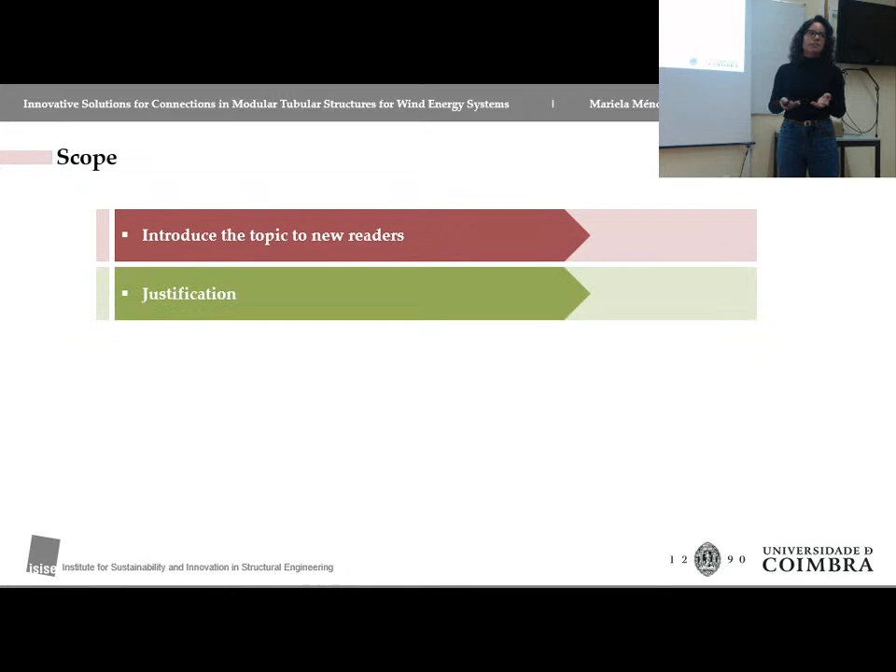I have to say that I am in the earliest stages, so you will see a lot of things of what we want to do instead of what has been done until now. And I'm carrying this research under the supervision of Professor Carlos Rebelo, Trayana Tankova, and Professor Ricardo Branco from the Department of Mechanical Engineering. So I will try to introduce the topic a little bit, where this research came from and justify the validity of it, then explain the objective that we have, the methodology we try to use, and conclude with some final remarks.

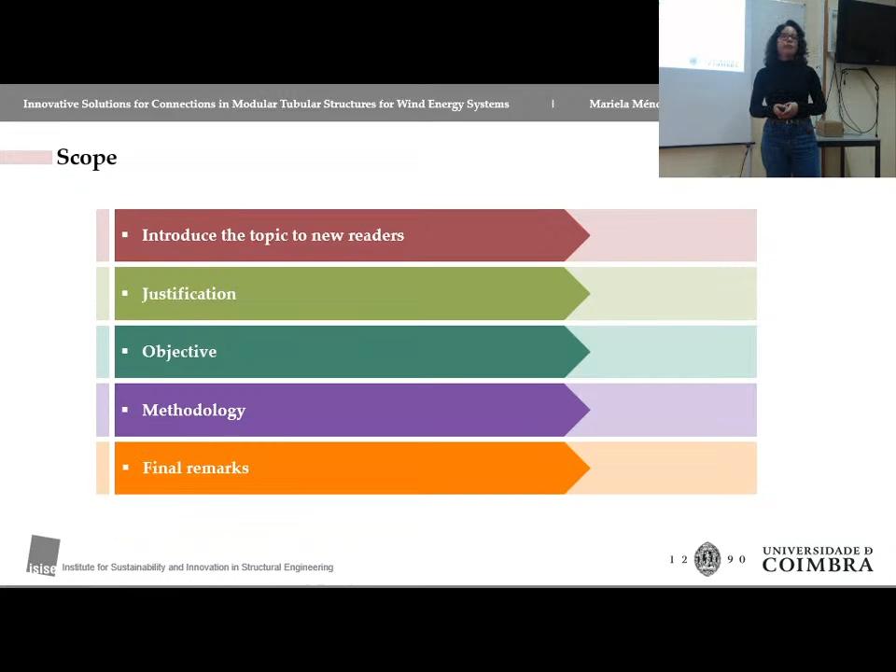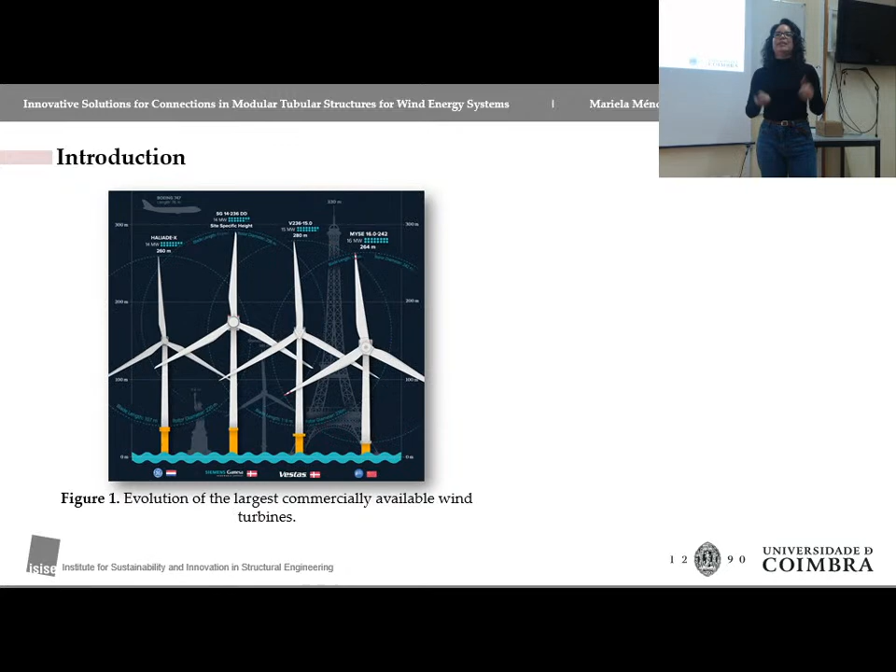But this is not only a problem of onshore wind turbines, because actually offshore we only have in the world more or less like 25-30 vessels that can transport this type of wind turbines. And yeah, I'm talking about the whole world.

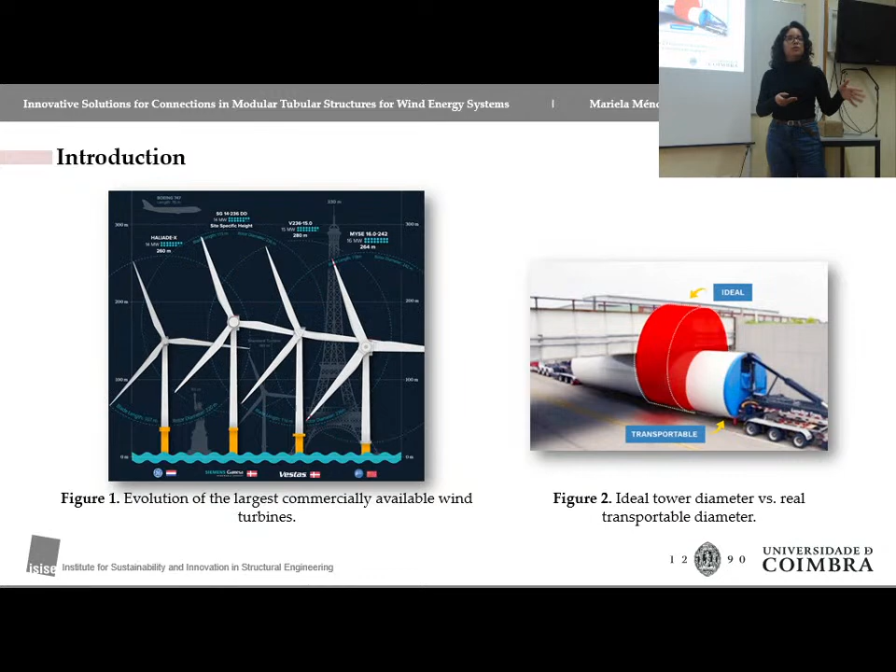So what is happening is that many countries are switching to smaller turbines again, because it's so difficult for them to find the equipment to make these installations. So in summary, we now have very big, larger turbines that require bigger and heavier supporting structures.

And this comes with two new challenges, some of them from the technical feasibility, because we now require a very high level of precision, and this has made the manufacturing costs very high as well. And some other challenges from the logistics point of view, because they are very difficult to transport, very difficult to install, and sometimes they can make potential wind sites unfeasible just because it's impossible to reach them.

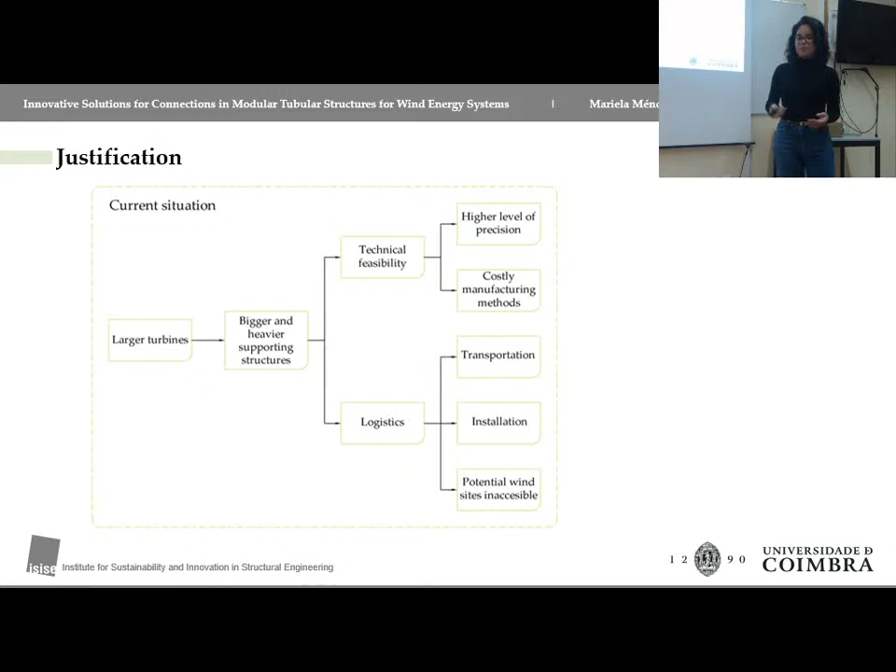So right now, the industry is trying to work on how to reduce the cost, improve the technologies that are being used, and also all of this to facilitate the installation of new wind farms.

And as I told you before, what has been happening is that we are using nowadays smaller wind turbines, or even for the big ones, there's a rise in the popularity of modular and light structures like jackets or lattice structures or things made out of panels, either concrete, steel, you name it.

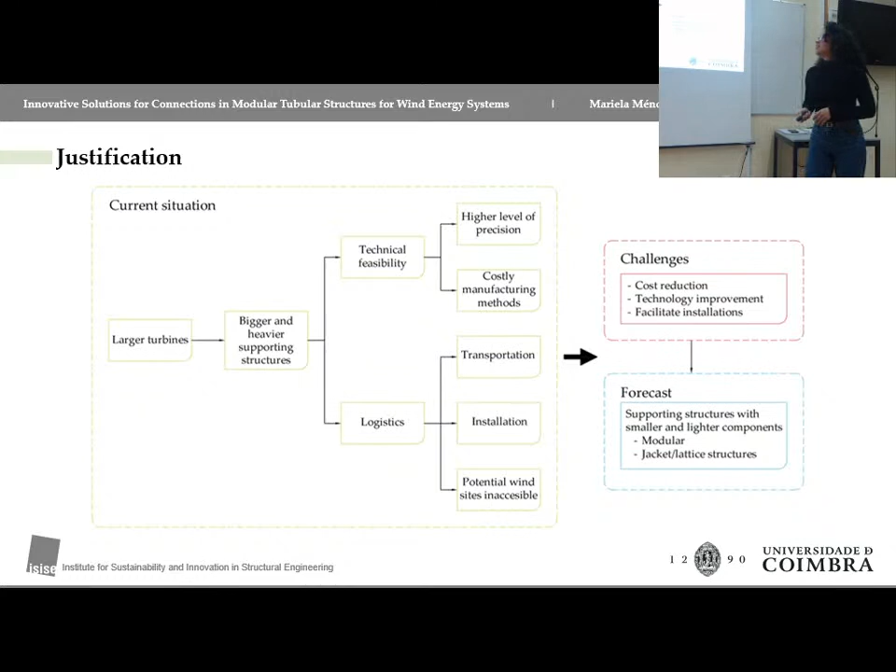So in our case, what happened was that we started working in partnership with a company called WunderOcean that has offices in Figueira da Foz, and they came up with this idea to have a modular tower that is self-assembled. So basically you have some concrete and steel panels, a steel skeleton structure, and then an outer concrete shell to protect the tower from the elements, and there's an internal rail that allows for a small crane to grow with the tower and start assembling all the pieces.

So we started developing this project, but then we came with a challenge, let's say, that we have a lot of connections.

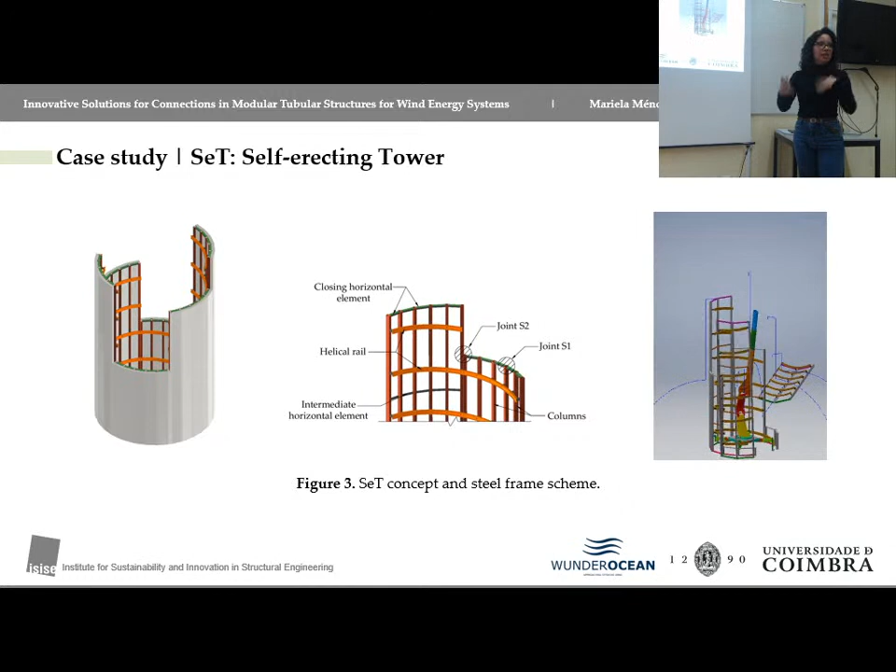Because of the modularity, because of the panels, they are easy to transport. They don't have limitations in terms of size, because now you can design them exactly to fit a lorry, let's say. But we have an enormous amount of connections. That's how everything began: how do we do this, how do we solve these connections?

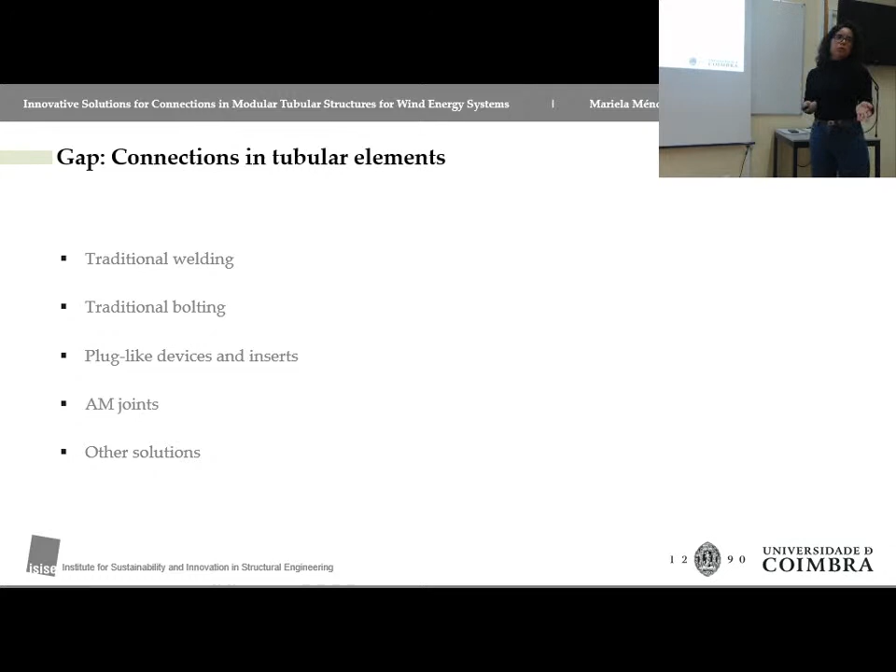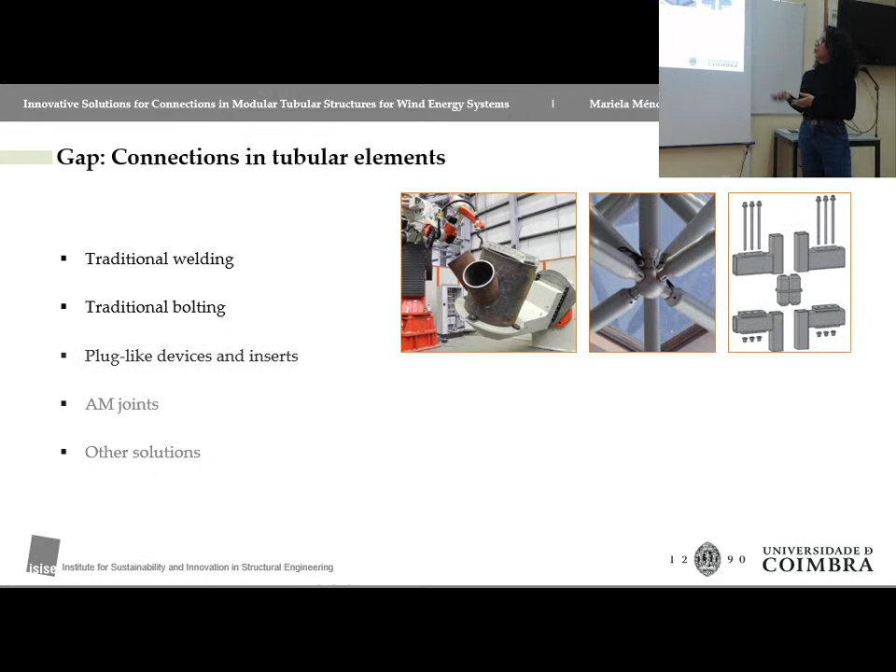We looked at what has been done recently, especially for tubular elements, because the reticular steel structure is made out of tubulars. We saw a lot of welding and bolting. Then we found, for other structures, some plug-like devices and inserts, but this has never been applied to such large structures. Then we saw the potential of additive manufactured joints, and very conveniently we now have the facilities here in our lab, along with some other solutions like cast joints or composite wraps.

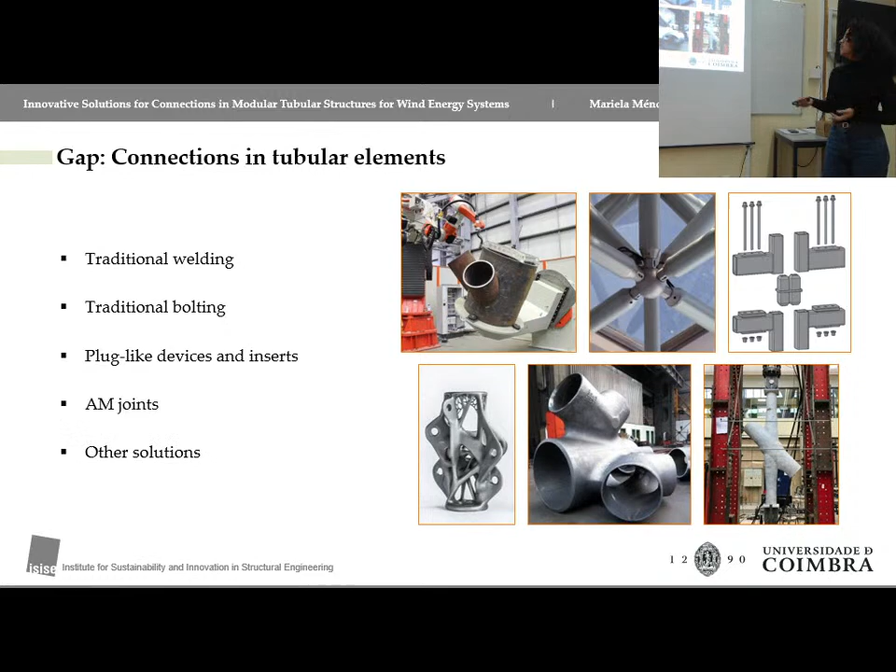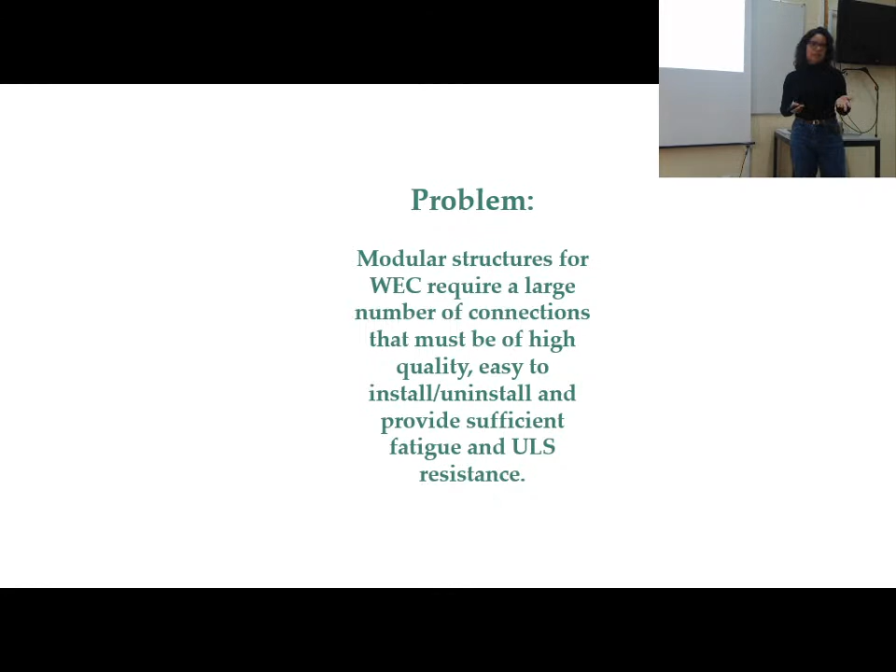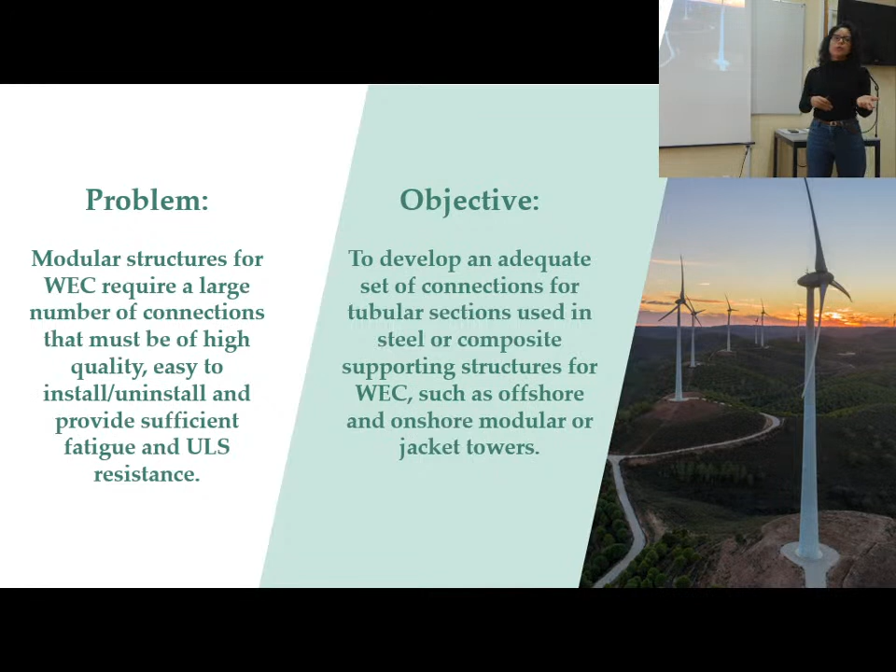So having this in mind, our problem is that we have a lot of modular structures now for wind energy converters that require a large number of connections that must be of high quality, easy to install and uninstall, and provide sufficient fatigue and ultimate limit state resistance. So we want to develop an adequate set of connections for tubular sections using steel or composite supporting structures for wind energy converters, either offshore or onshore, like modular or jacket structures.

And how do we want to do this? As I said, we looked at what has been done recently, and additive manufacturing seemed like a very feasible idea. We now have the facilities here in the lab to produce joints or pieces with additive manufacturing, and that will help us a lot with technology improvement.

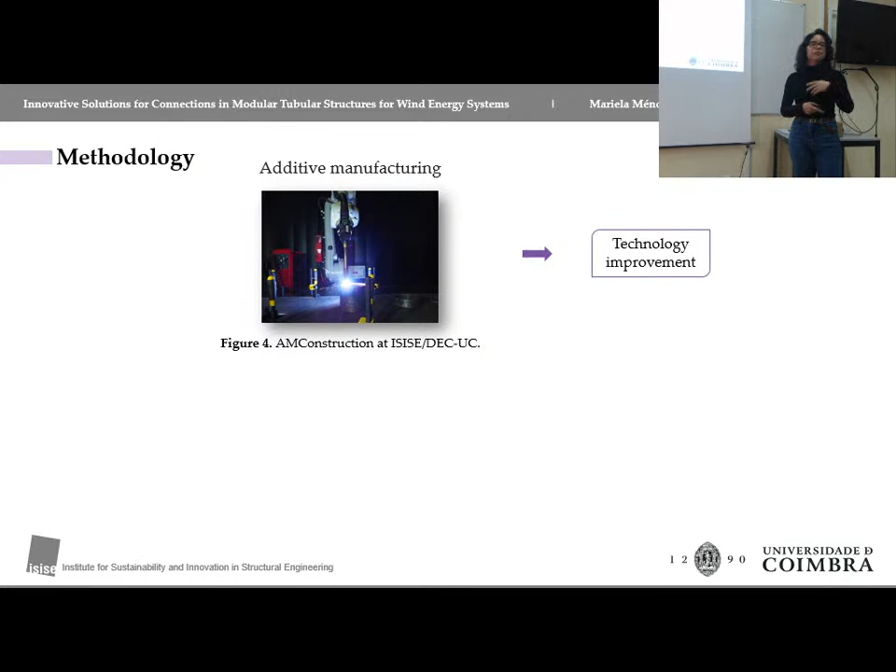I have to say that additive manufacturing is already used in the wind sector. So we got the inspiration from that—for example, you already see welding in monopiles, just internal welding for maintenance, repairs, and operation. It's also highly implemented in the production of the blades.

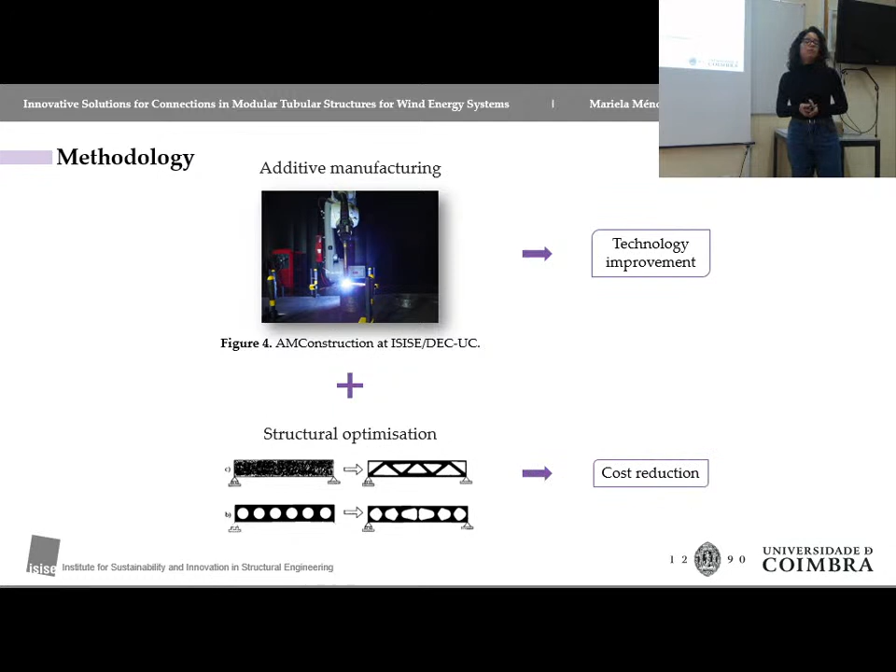But if we really want to take advantage of additive manufacturing, then we must do structural optimization that will allow us to reduce the cost, because then we know that whatever we are producing is actually going to be the most effective shape.

Then we go into lifetime estimation, durability shape, re-engineering, production, testing, and validation—but I'll go through each one. Regarding the first stage, as I told you, we develop a concept, then do a topology optimization in which we only use static loads and linear elastic material parameters. So we only input the Young's modulus, Poisson's ratio, and the density, using strain energy as the objective function and volume as the constraint.

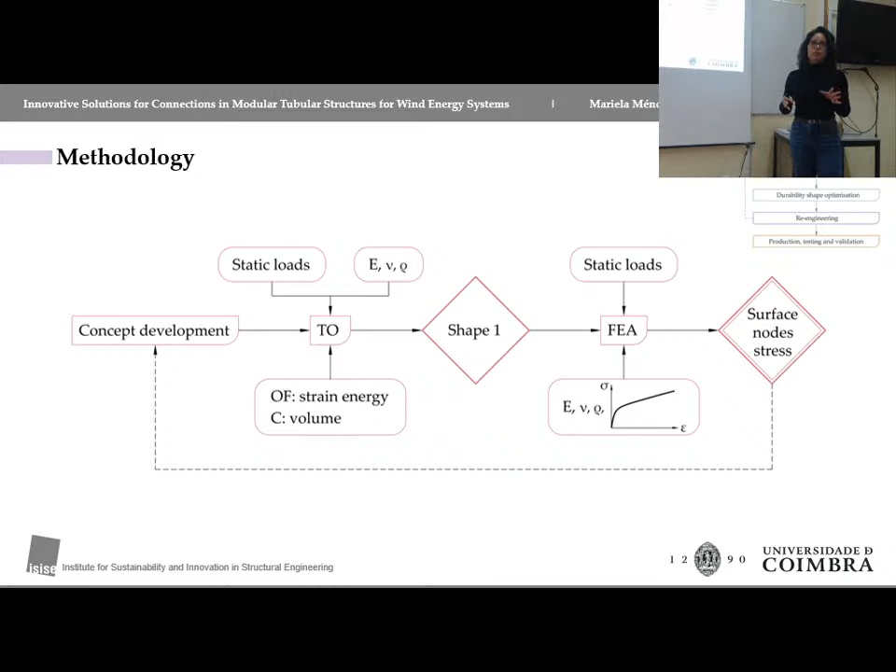So this is just a first step, just to have an idea. From that, we get a first shape. But because we are only introducing the Young's modulus—if you look at the algorithm of the shape optimization, it only focuses on the Young's modulus—we know we have a very stiff shape, but we don't know its actual resistance.

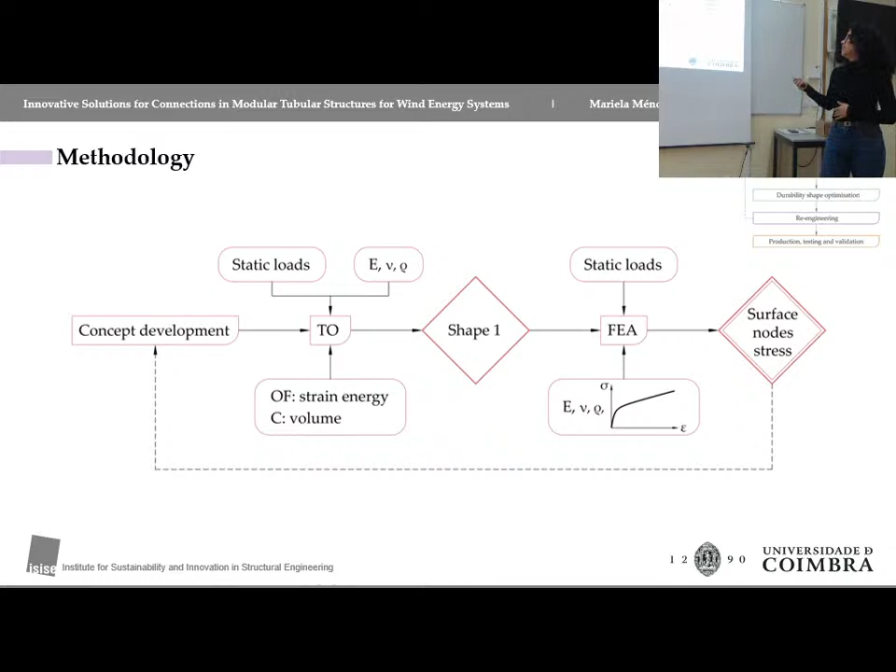So after that, we go to the finite element analysis, in which we include the plastic material properties. We can do this as many times as we want—you can change the number of bolts, the diameter, the outer tubular, any of the optimization parameters. At the end, when we are satisfied, what we want is the surface node stresses to go to the next step.

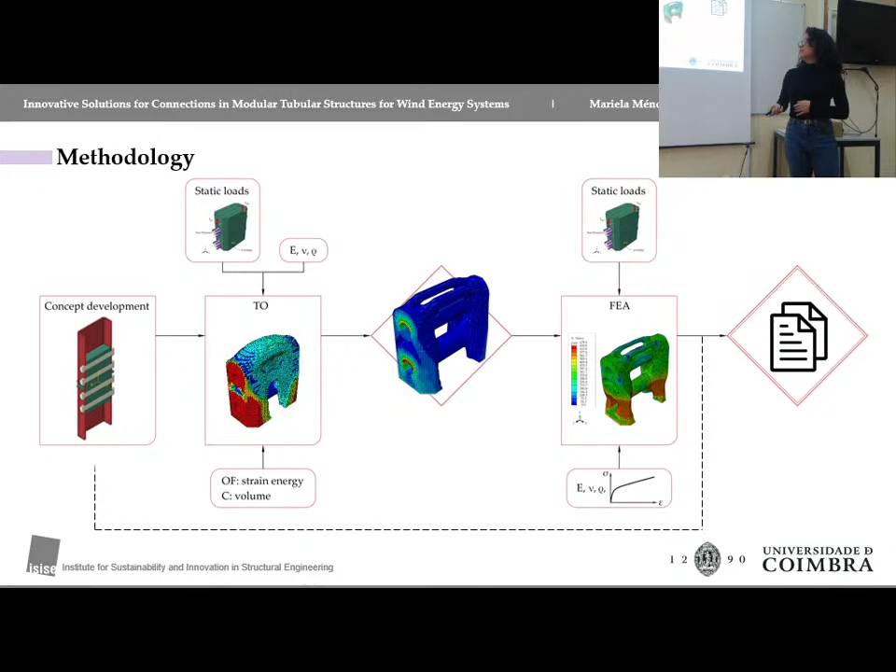So this is what I have been focusing on lately. We develop a concept that's just putting an insert inside two tubulars and putting everything together with bolts. Then we go to the topology optimization and get a first shape that we know is very stiff, but we don't know its resistance. So then we go to the finite element analysis, and we get a lot of data for the surface nodes—and this can go as many times as you want.

We also need the fatigue parameters to do this modeling. After that, we get the surface nodes life prediction, and we can do a durability shape optimization based on this life prediction. The objective function is to minimize the maximum damage and control the volume. But again, we use the static loads here, and then we get a second optimized shape.

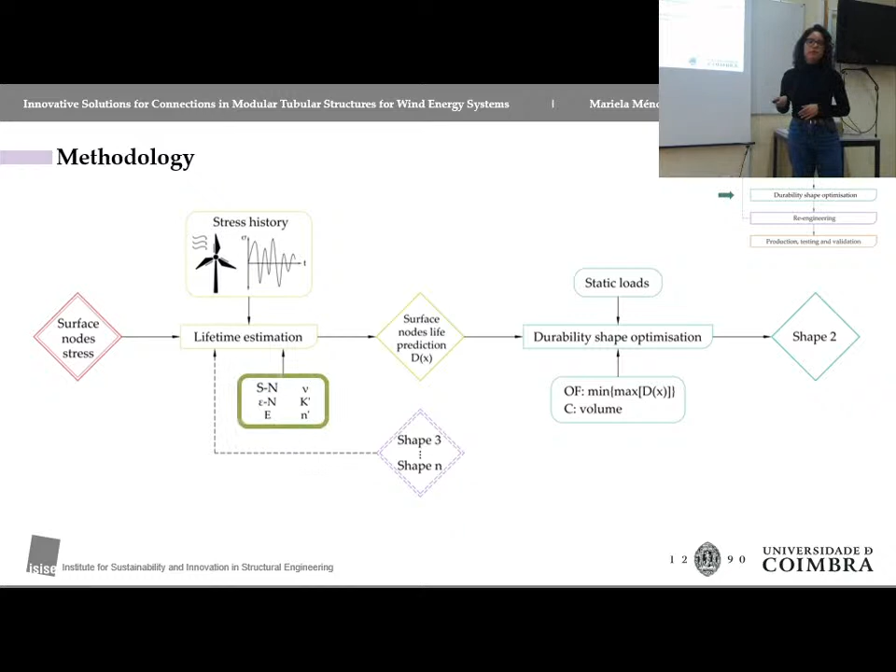Right now, what we are doing is trying to find this out. So we are focused on finding the cyclic properties of the material. How are we going to do that? Through an experimental campaign. We have divided the experimental campaign into two parts: the first focused on low cycle fatigue and fatigue crack growth, and the second on high cycle fatigue and fatigue crack initiation.

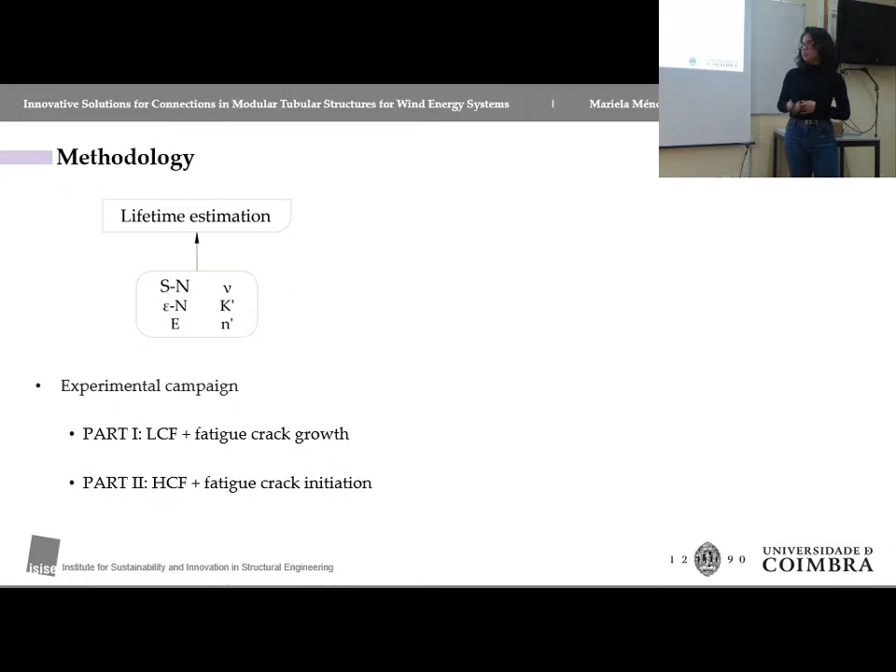In the first part, we already started, so we have the shape of the coupons we want to test, the program has been detailed, and we made the first test in the lab to see how we can print this wall, basically a big plate. We are going to get 3 fatigue specimens through the thickness of that plate to also evaluate if there is variation of material properties along the thickness of the printed material.

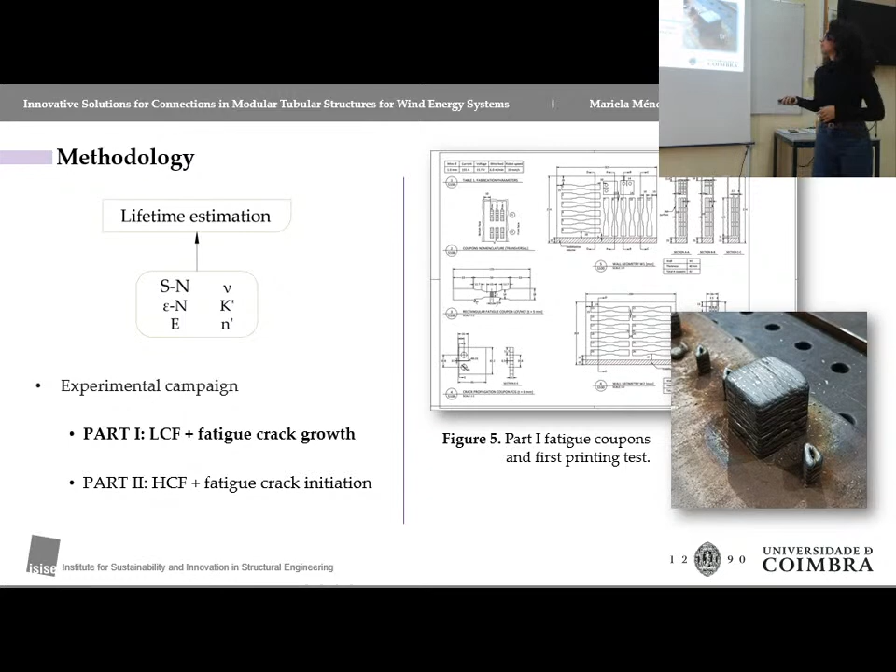After we do that, we go to re-engineering and production, testing and validation. So we get our final shape that we now know makes sense, has sufficient strength, and has the desired lifetime. That comes from a process of iterations, but let's say that's our ideal shape.

Then we have to do the re-engineering, which is very important, because not everything we do in a computer can actually be produced by the capabilities of the machines we have in the lab. So even with the most perfect ideal shape, you still have to compare that to what you can do in the lab—maybe there's something too thin, or an angle that's too close. All of those things have to come into consideration.

In this part, I want to highlight the work of our two colleagues, Carlos Hu and Kaique Monteiro, because they are working very hard to find out what we can print, what the capabilities of the robot are, and trying to build a kind of database so we don't have to go through a calibration process every time we want to print something.

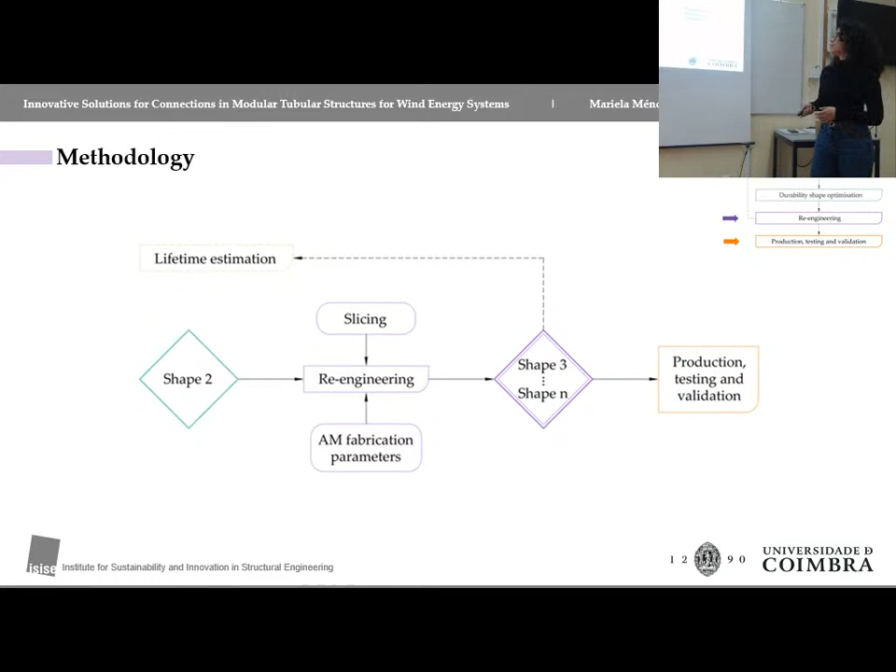After that, we get our last and final shape, which we have to check again for life estimation, because maybe we altered some details that were important for fatigue. And then on to production, testing, and validation. In theory, that's done.

But to conclude, I think it's very important to highlight the importance of modularization and simplification in the wind industry. As we saw, it's quite important to make this kind of new emerging renewable energy technology available for everyone.

Also, I think it's important to highlight the importance of using new technologies like optimization and additive manufacturing jointly. This type of optimization process can be found in some literature, in different ways, similar, but it has always been applied to mechanical parts. We got some information from what they do for pieces of engines, mainly engines, but it has never been applied as such to a structure.

To know if the shapes we come up with make sense, we are also comparing with traditional types of joints, maybe using only bolts, or plates and shear, or other devices available in the market. We found that our shapes are usually more efficient, in terms of strength and volume, in over 60% of the compared cases.

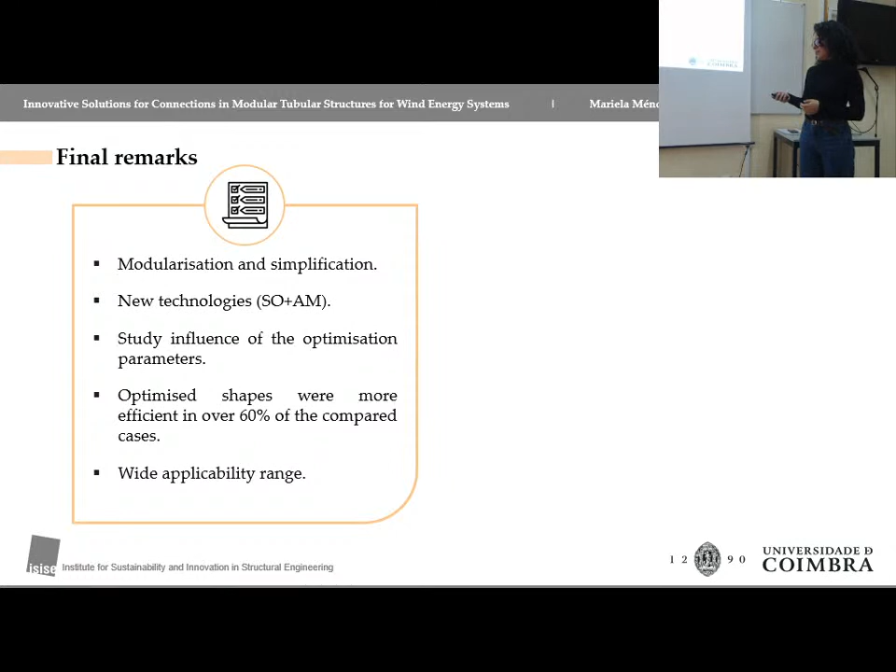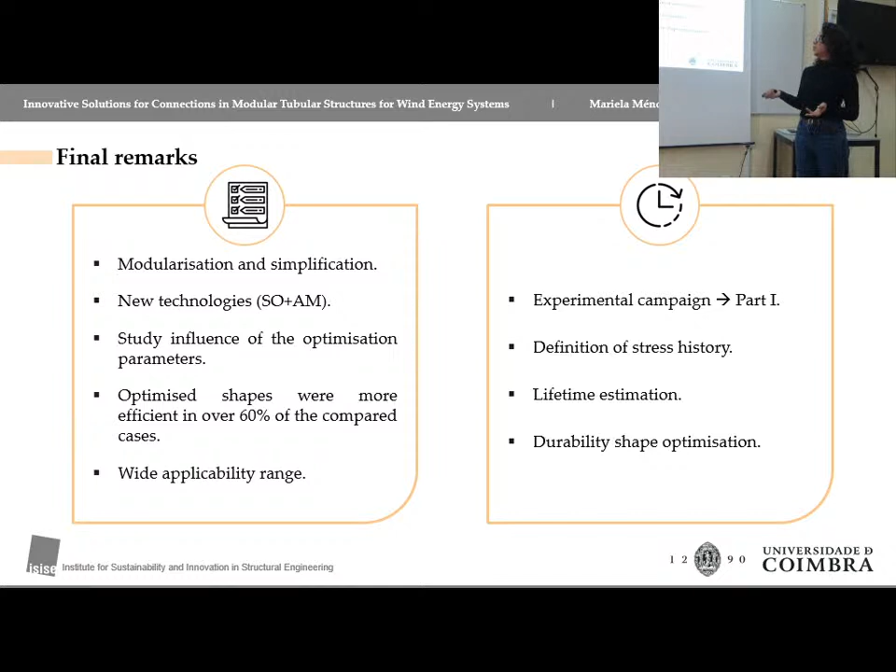So, an acknowledgement to the funding of this work, which was initially the project of the self-erecting tower, and now the research grant by FCT.

And as a treat for today, let's say, I brought some samples of what has been done in the lab. So you can take a look, because I think many of you have seen them from far, like the things over there, but I don't know if you've had the possibility to actually touch them or see them, or just take a look at the final finishing, what we are talking about. These two, for example, one is produced by Wire Arc Additive Manufacture, that's the big robot on the right if you've seen it, and this one is by laser.

So you can also compare the finishes of these two blocks. This is the one that we produced to test the plate that I have to do for the fatigue experiment. So if you just want to basically touch and have a closer feeling of what we are doing in the lab - Carlos and Kaique know these pieces very, very well, probably by memory.

I hope you enjoyed the presentation and got to know a little bit of what I have been doing lately, and let's say what the additive manufacturing group is doing. Thank you so much for your attention.